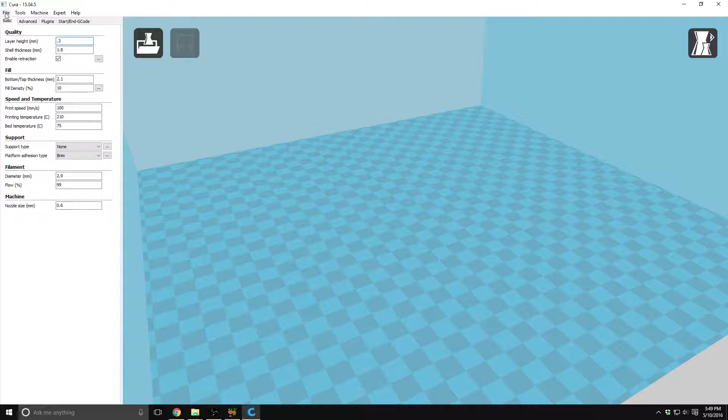So we can go up here to File, Load Model File. And the David head is our test print of choice. Due to its complexity, it's great to test out the finer details on the Readybox.

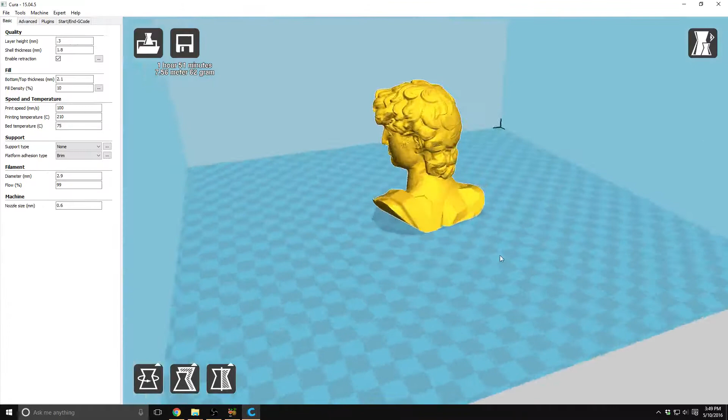So if you haven't used Cura before, you can rotate the screen around by holding the right mouse button down and dragging. You can scroll to zoom in and out, and you can also hold down the middle mouse button and move the mouse up and down to zoom. You can click and drag with the left mouse button to move the object around.

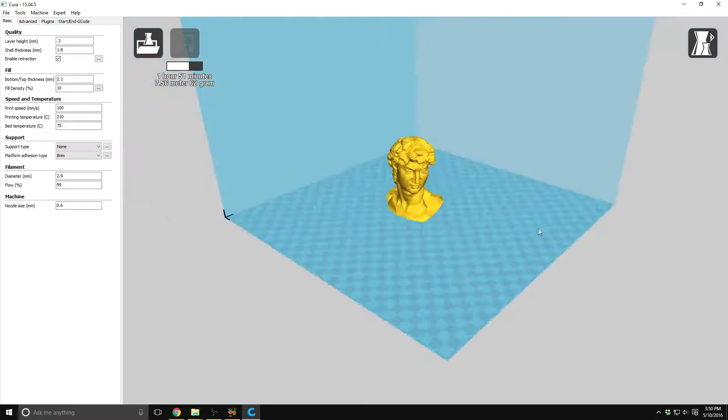So that's pretty straightforward. If you select the model, you can mirror it. You can scale it up. Let's scale this up to 2 so we can take advantage of the Readybox's build volume and speed. And you can also rotate it as such.

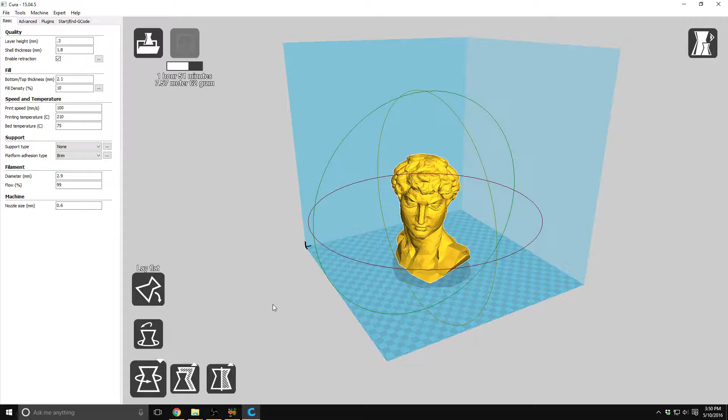So I encourage you to play around with these settings. However, you do want to make sure the model is always flat on the build plate, otherwise it will fail.

So that's a really basic introduction to Cura. If you select the model, you can right click it and you have all these options. One useful one is multiply object. This will allow you to print out the same object multiple times.

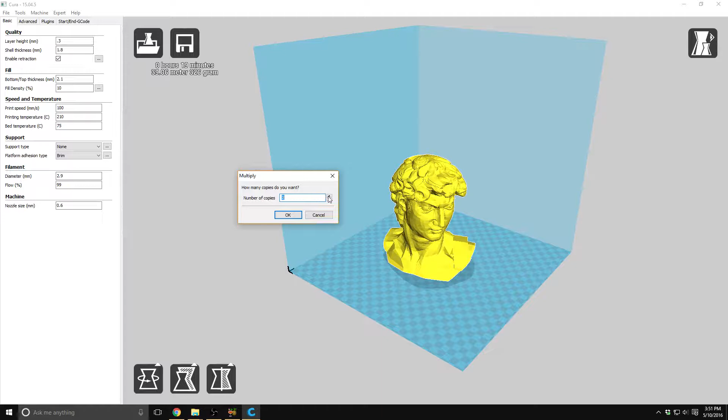So we can print out 2 heads. However, the objects do have to be on the build plate, and if they aren't, you can just hit yes and it will center it.

It looks pretty good. So as you can see with the status bar up here, Cura is currently slicing the file, and once that's done, these values are going to update, but this is the estimated time it'll take to print out the print, and this is how much material is estimated to be used.

So quick settings, layer height is up here, which you can adjust. You can also adjust the fill density, and if you do need support, you will not on this print, but you can change that right here.

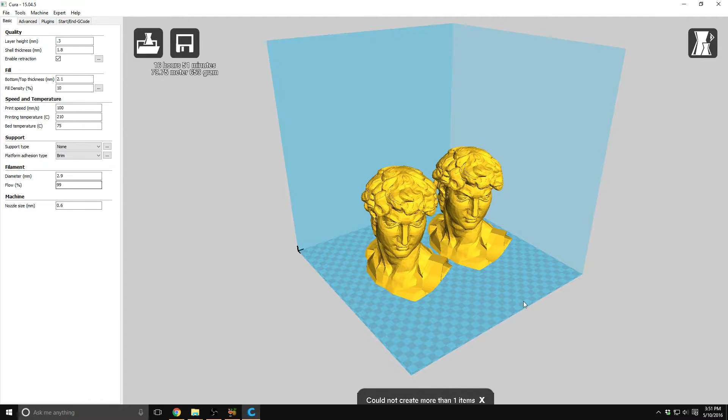And everything looks good, so we can go ahead and save this off. You'll notice it's the G-code, and you can put that G-code file on the Readybox via the USB cable and start printing. So that's it, and have a great day.